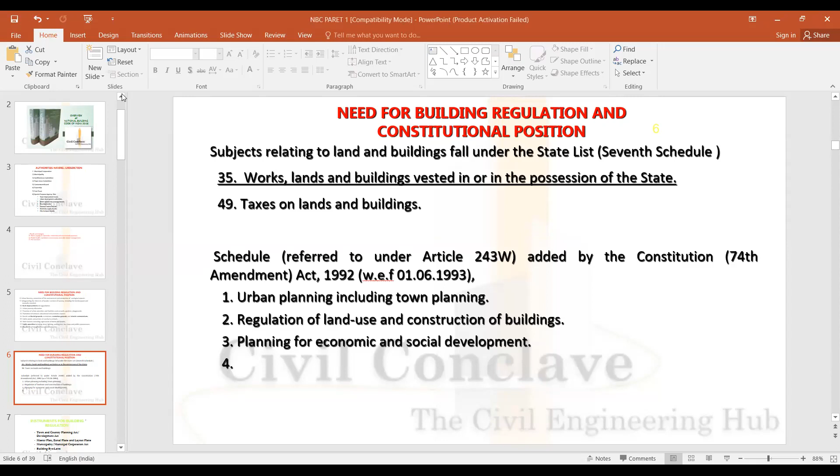Dear friends, every one of the engineers knows about the code known as National Building Code. It is reaffirmed, rewritten, or corrected in the year 2016. But how many of us know the entire depth of the National Building Code?

As it is a huge volume, people might not have time to read it in entirety. What I was trying to do is take out the key points from NBC 2016 and give a small presentation. As it is huge, I converted it into five parts. Today we are going to discuss part one.

This I call an overview of National Building Code 2016.

Authorities having jurisdiction on this National Building Code 2016 are municipal corporation, municipality, notified area committee, town area committee, cantonment board, township, port trust, special purpose agencies like town improvement trust, urban development authorities, water supply and sewerage boards, housing boards, pollution control board, electricity supply board, city transport boards, roads and bridges, water supply for domestic and commercial purposes, public health, sanitation, conservancy, and solid waste management, fire services, urban forestry, protection of the environment.

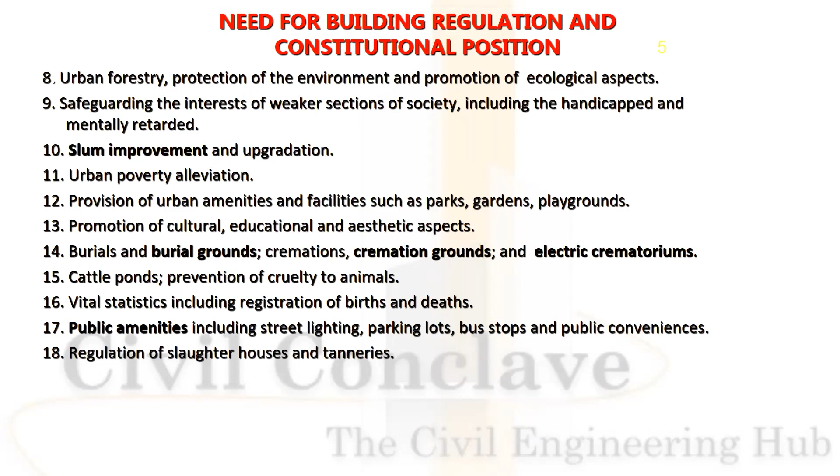Subjects relating to land and building fall under the state list, which is known as the seventh schedule.

Work, lands and buildings vested in or in the possession of the state, taxes on lands and buildings. You can refer Article 243W added by the Constitution through the 74th Amendment Act 1992, with effect from 1/6/1993, covering urban planning including town planning, regulation of land use and construction of buildings, and planning for economic and social development.

Institutions for building regulations are covered under the Town Country Planning Act, Development Act, Master Plan, Zonal Plans and Layout Plans, Municipality and Municipal Corporation Act, and Building Bylaws.

Authorities for additional clearances which may be required: fire authorities, who can clear high-rise and special buildings.

Chief Inspectorate of Factories can clear industrial buildings. Pollution Control Board as per respective state norms. Chief Controller of Explosives, Nagpur, for hazardous buildings. Urban Art Commission as per relevant act.

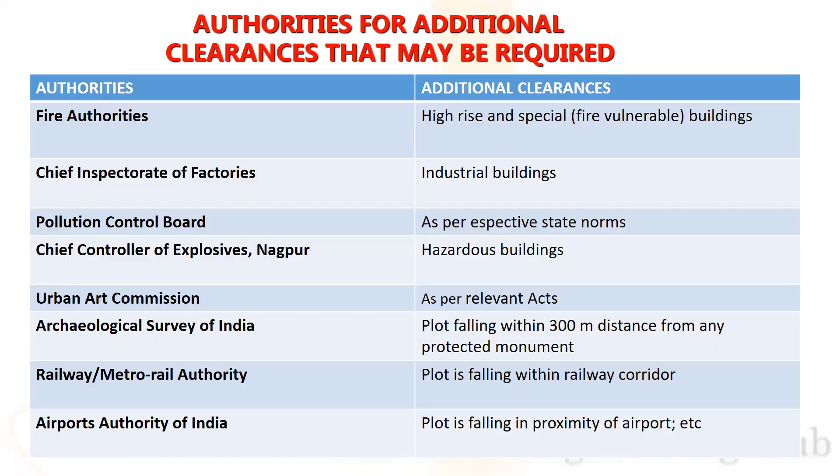This is what the building activities look like: core building, local authority, supporting activities, building planning and design.

This has been done through building plans and design approvals. Once it is approved, it goes to execution of the building work.

On this side, the structural design, building plan and design is done by the registered design professional, completing the design. Then it comes to execution of the building work, which goes to inspection of layout, foundation, plinth, objections if any, and compliances.

Here are records for materials and records of supervision, supervision by registered professionals. Then it goes to completion of the work, with final inspection and occupancy permit.

Then you get a building permit. Here is the final report of execution by building contractors and supervision by supervising professional, leading to building occupancy. Complete. If there is any renewal or anything to be done, it has to be done. Then we get continued occupancy.

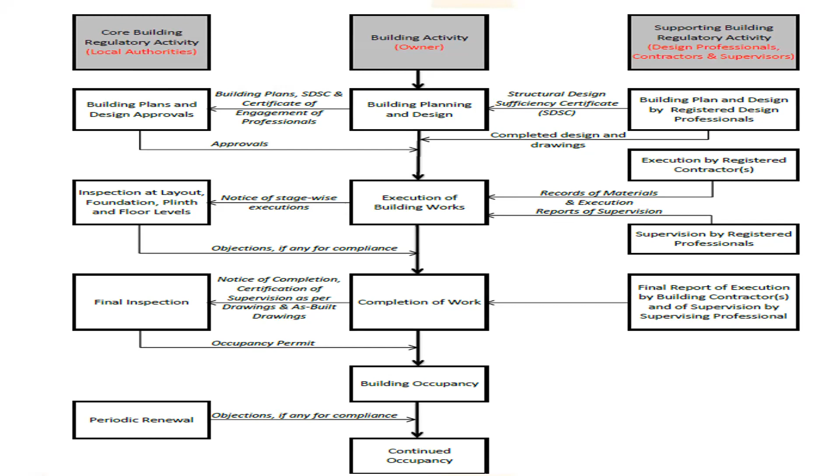History of the National Building Code. In 1965, a panel of experts was appointed by the planning commission to study the constructions, administrative, organization, financial aspects, etc.

1965-68, report on economies in construction costs were recommended. One of the important steps for achieving economy is the formulation of a unified building code at the national level. For this, the NBC was brought out to unify building regulation throughout the country, with the job entrusted to the ISI, now BIS.

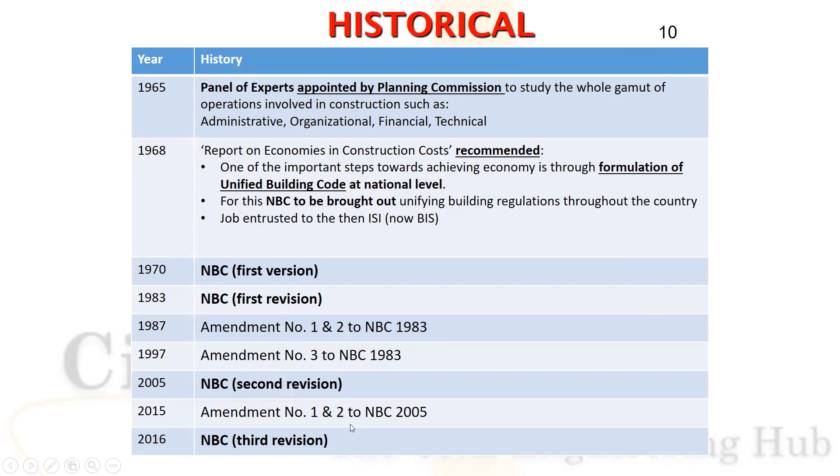1970, first version. 1983, the first revision. 1987, amendment number 1 and 2 for NBC 1983. 1997, amendment number 3 to NBC 1983. 2005, NBC second revision. 2015, amendment number 1 and 2 to NBC 2005. 2016, NBC third revision.

Salient features of NBC 2016: dealt with by National Building Code, CED 46 of BIS. Revision in the code was initiated in 2014.

22 expert panels were involved, with around 1,000 experts contributing. Around 50 meetings of the expert panels were organized, involving stakeholder engagement and a wide consultation process. The revised code is a culmination of the untiring efforts of the experts of BIS, a voluminous document published in 2 volumes.

Substantial improvement incorporated for ensuring structural stability and disaster resistance, accessibility of the building and built environment for persons with disability and elderly, fire safety of modern complex and high-rise buildings, use of new innovative building materials and technologies, ensuring speedier construction through prefab technology, installation of modern plumbing and building services, ensuring IT-enabled buildings, sustainability and conducive outdoor building environment, management of constructed building assets and facilities.

Local bodies for framing and revamping the existing local building bylaws, the government and private construction agencies in their construction activities, the building professionals like architects, engineers, structural engineers, town planners, building service engineers, and consultants in the design of a building and built environment, building material suppliers and technology providers, research institutions for research purposes, faculty and students of academic institutions for imparting technical education to architectural and engineering students by using the code as part of their curriculum.

Content of the NBC 2016: Part 0, integrated approach. Part 1, definitions. Part 2, administration. Part 3, development control rules and general requirements. Part 4, fire and life safety. Part 5, building materials. Part 6, structural design. Part 7, constructional management practices and safety. Part 8, building services. Part 9, plumbing services. Part 10, landscape development, signage and display structures. Part 11, approach to sustainability. Part 12, asset and facilities management.

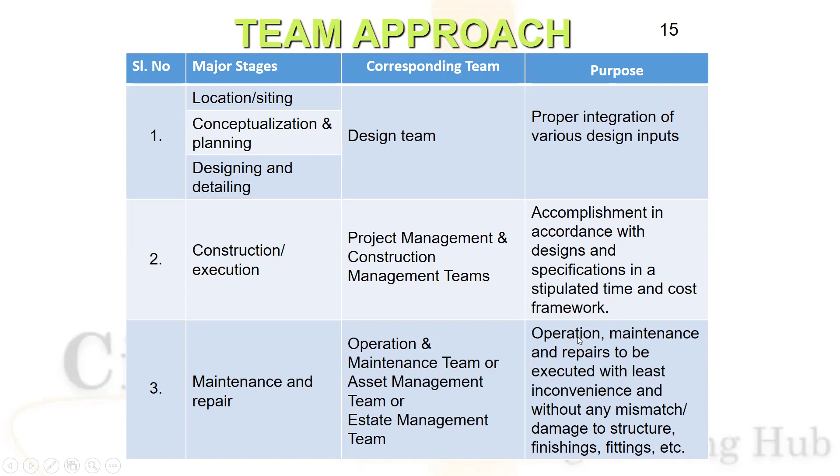Then comes part three, maintenance and repair, handled by the operation and maintenance team or asset management team. The purpose is operation and maintenance, with repairs to be executed with the least inconvenience to the existing structure or fittings, etc.

Multidisciplinary team of building professionals, each with their own purpose: architects, civil engineer, structural engineer, geotechnical engineer, electrical engineer, plumbing engineer, fire protection engineer, HVAC engineer, lift and escalator engineer, acoustic specialist, information and communication technology specialist, health and safety environment specialist, environment and sustainability specialist, town planner, urban designer, landscape architect, security system specialist, interior designer, quantity surveyor, project and construction manager, accessibility and universal design specialist, asset and facilities manager, and other subject specialists.

Major specifications in the integrated approach: professionals and agencies to ensure proper discharge of responsibility for accomplishment of the building project. Inclusion of professionals such as geotechnical engineers, ICT engineers, sustainability specialists, and other subspecialties. Further reinforcement of various considerations to be taken care of by the design team, project and construction management team, and operation and maintenance team, considering present day requirements and expectations from buildings and the built environment.

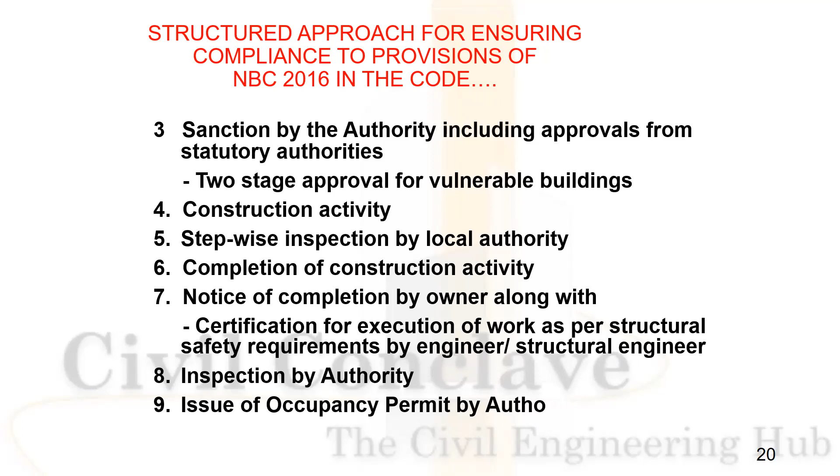Part 2, administration. This covers the administrative aspects of the code, such as applicability of the code, organization of the building department for enforcement of the code, procedure for obtaining development and building permits, responsibility of the owner, and all professionals involved in the planning, design, and construction of the building.

Part 2, administration: qualification and competence of registered professionals, known as Annexure A, responsibilities of the owner and the professionals involved, and 12 standard forms.

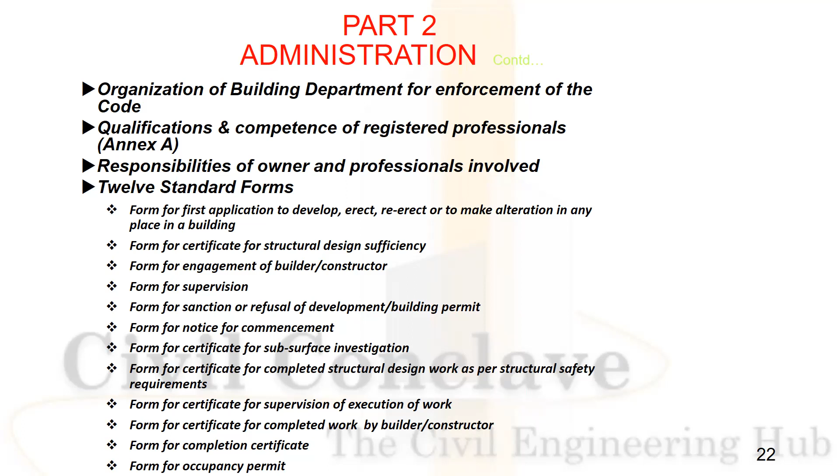Form for first application to develop, erect, re-erect, or make alteration in any part of the building. Form for certificate for structural design sufficiency. Form for engagement of builder and constructor. Form for supervision. Form for sanction or refusal of a development building permit. Form for notice for commencement. Form for certificate of subsurface investigation. Form for certificate for completed structural design work as per safety requirement. Form for certificate for supervision of execution of the work. Form for certificate for completed work by builder and constructor. Form for completion certificate. Form for occupancy.

Major modification in Part 2: streamlining the approval process with respect to various stages in the form, through an integrated approval process via a single window approach, through which we are avoiding separate clearances from various authorities. Updated provision on computerization and the approval process.

Reinforcement of the provisions on the mechanisms for ensuring certification of the structural safety of buildings by competent professionals and peer review of design of buildings. Fixation of responsibilities for geotechnical engineers and contractors involved in building construction.

Part 3, development control rules and general building requirements. This part deals with the development control rules and general building requirements to ensure the health and safety of the public.

These are all the general control rules: land use classification and uses permitted, cluster planning approaches, inclusion of detailed town planning norms and various amenities such as educational facilities, healthcare facilities, socio-cultural facilities, distribution services, police, civil defense and home guards, fire services, telephone, telegraph, postal and banking facilities, sports activities, shopping, religious, electrical substation, transport, cremation, burial ground, etc.

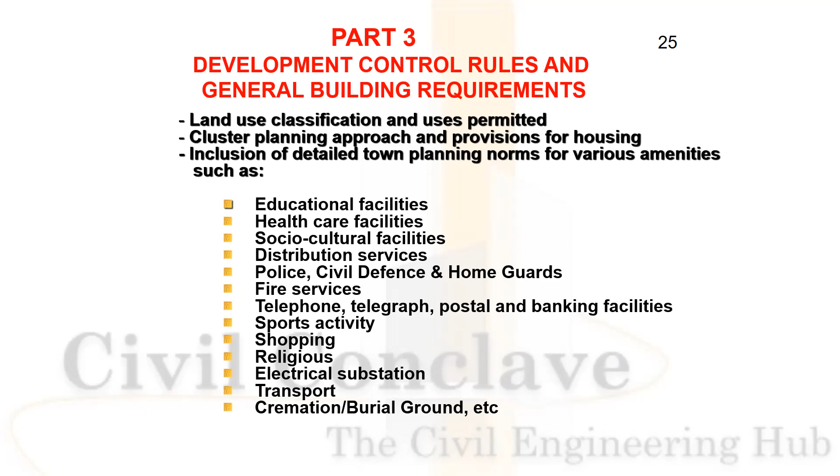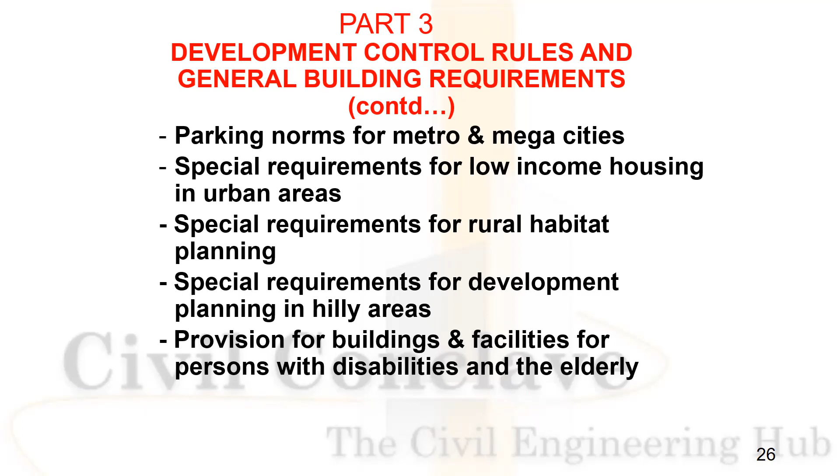Parking norms for metro and mega cities, special requirement for low income housing for urban areas, special requirement for rural habitat planning, special requirement for development planning in hilly areas, provision for buildings and facilities for persons with disabilities and elderly.

Major modification in part 3: modification of the land use classification, modification of the planning norms for various amenities provided in a city, and also inclusion of provisions for new amenities, barrier-free built environment, comprehensive approach for accessibility of buildings and built environment, provisions in new planning development norms such as transferable development rights (TDR), and accommodation reservation.

This part also refers to transit-oriented development.

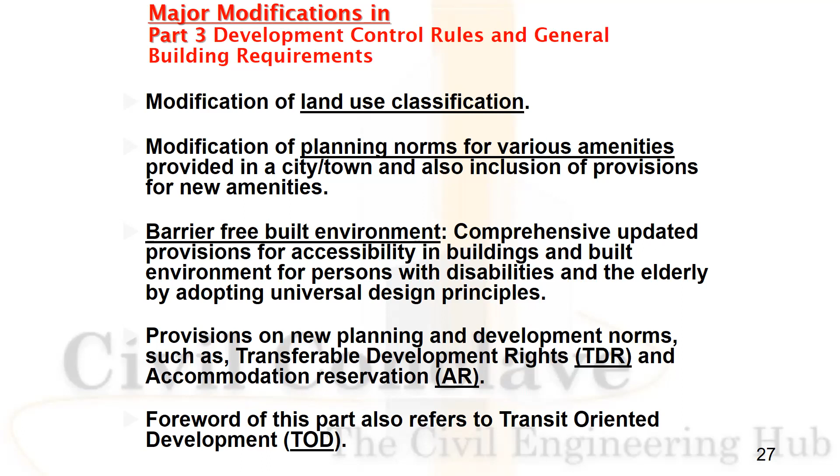Updated requirement for fire tender movement, keeping in view the availability of more equipped fire tenders of higher capacity.

Provision for underground or multi-storey parking and mechanized parking of vehicles. Updated provisions on the basement, keeping in view the latest developments. New provision for solar energy utilization.

Updation of the special requirements for low-income housing groups and for development planning in hill areas. Incorporation of requirements for upcoming buildings on podiums, ensuring fire and life safety for such buildings.

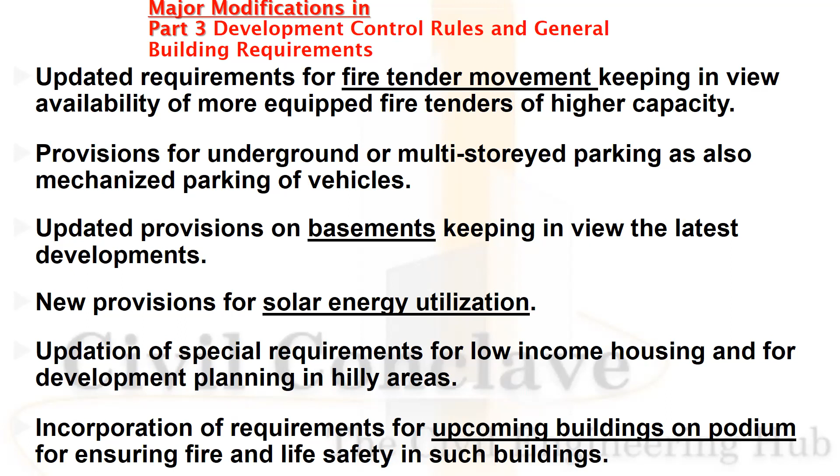Part 4, fire and life safety. In this part, NBC discusses fire prevention, life safety, and fire protection.

Group A residential, which consists of lodging and rooming houses A1, one or two dwelling family A2, dormitories A3, apartment houses A4, hotels A5, starred hotels A6. Group B educational: senior secondary level B1, training institution B2. Institutional: hospital and sanatorium C1, custodial institution C2, penal and mental institution C3.

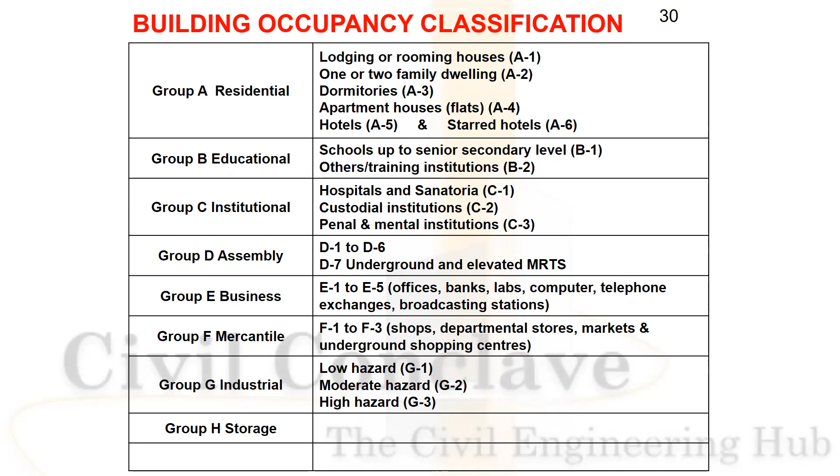Group D assembly D1 to D6, D7 underground and elevated MRTS. Group E business: offices, banks, labs, computer centers, etc. Mercantile: shops, departmental stores, markets, and underground facilities. Group G industrial: low hazard, moderate hazard, high hazard. Group H is storage.

Fire prevention zones are 1, 2, and 3. Type of construction 1, 2, 3, 4 depends upon the fire resistance rating.

Fire zone 1: A, B, C, D, E, that is small offices, with type of construction 1, 2, 3, or 4, which has already been explained. Number 2: E2 to E5, G1 to G2, with type 1, 2, or 3. Number 3: G3 group 1 or 2.

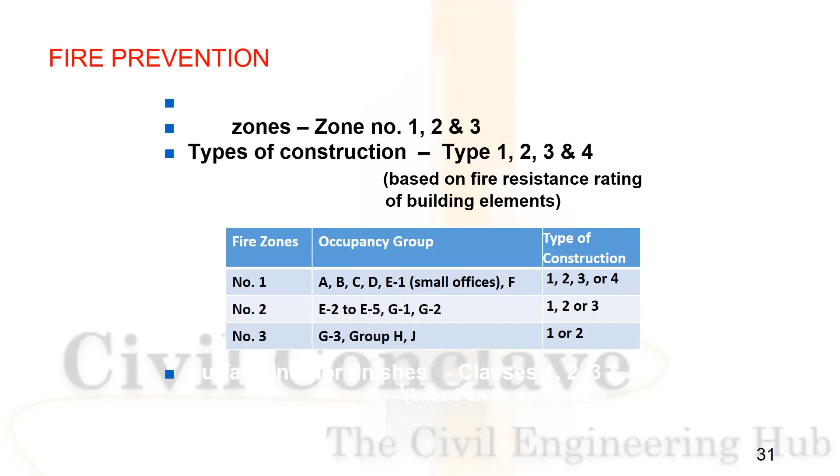Life safety, exit requirements, occupant load.

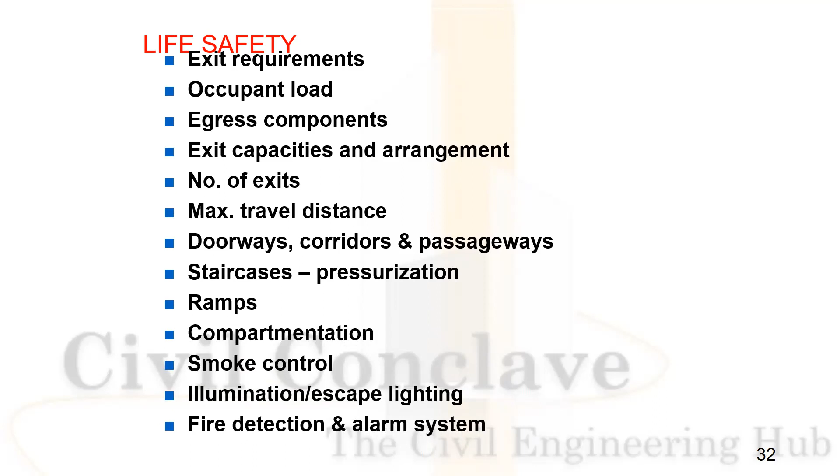Egress components, exit capacities and arrangement, number of exits, maximum travel distance, doorways, corridors and passageways, staircases, pressurization, ramps, compartmentation, smoke control, illumination and escape lighting, fire detection and alarm system, firefighting shaft.

Firefighting installation consists of fire extinguishers, first aid hose reel, wet riser, down comers, yard hydrant, automatic sprinkler system, manually operated electric fire alarm system, automatic detection and alarm system, underground static water storage tank, terrace tank over respective tower terrace, pump near underground tank, pump at terrace tank level, dry riser.

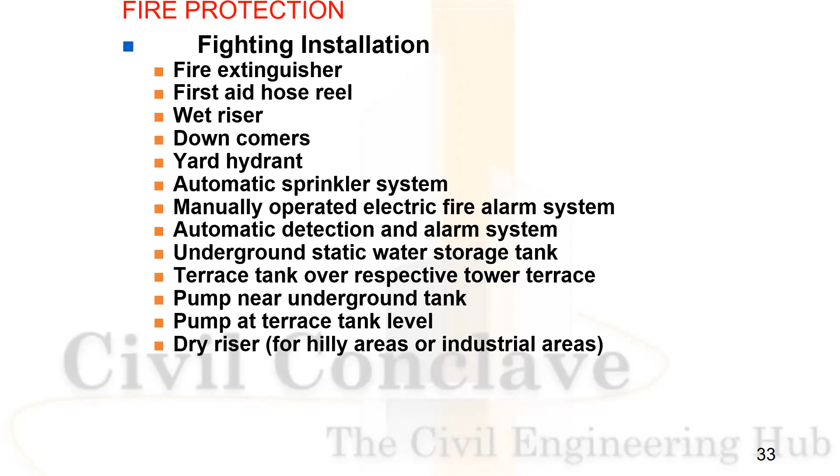This is for hilly areas and industrial areas. Fire protection requirement for high-rise buildings, fire drill evacuation process.

Major modification in fire prevention: Table 1 on fire resistance rating of structural and non-structural elements has been updated.

Detailed provisions for fire separating walls, fire separating partitions and floors. Separate comprehensive clause on electrical power supply, distribution, and fire safety norms.

Detailed provisions on air conditioning systems towards safety and smoke control integration. Glass facade requirements have been detailed towards fire protection and smoke exhaust aspects. Comprehensive clause on Fire Command Centre.

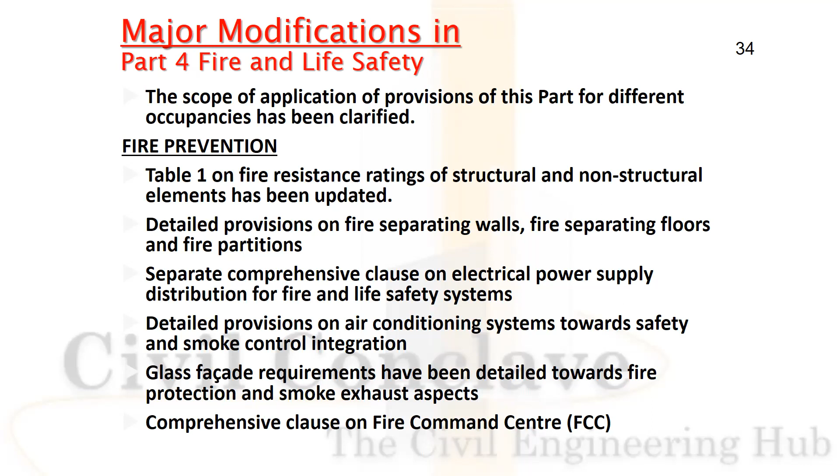The erstwhile Table 23 on minimum requirements for firefighting installation is now known as Table 7. Detailed provisions have been included on fire water storage, fire pump room, and sprinkler system.

Detailed provisions on the concept of progressive evacuation in case of hospital buildings. Provisions on refuge area have been updated, including D6 occupancy and apartments of more than 60 meters.

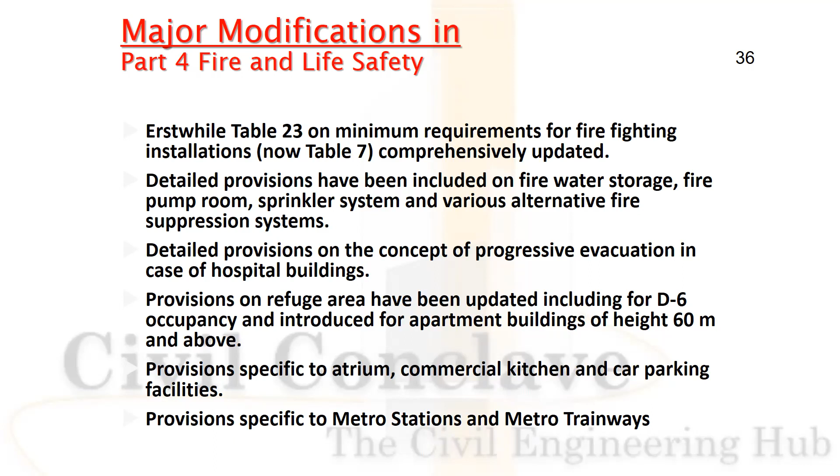Provisions specific to atrium, commercial kitchen, and car parking facility. Provision specific to metro station and metro trainways.

Categories of material: aluminum and other light materials, bitumen and tar products, builders hardware, builder chemicals, building lime, cement and concrete, cement matrix product, clay products.

Conductors and cables, doors and windows, electrical wiring, fillers, glasses, gypsum, paints, polymer, sanitary appliances, steels, stone, structural sections, thermal insulation, unit weights of building material, waterproofing and damp-proofing, welding electrode and wire ropes and wire products.

New alternative building materials, which we are talking about, in terms of sustainability for end application, strength property, durability, fire resistivity, thermal properties, acoustical properties, ease of working and handling, energy conservation, and environmental sustainability.